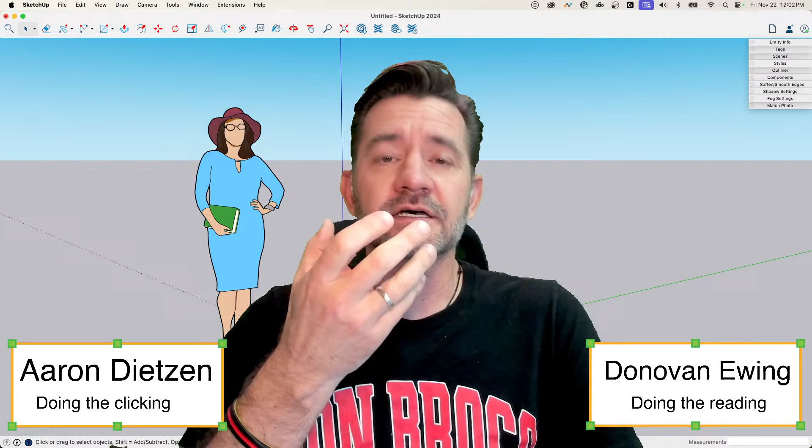When we were actually modeling live at Basecamp, I threw out a question to people with three options: quick and dirty Las Vegas building models like casinos or hotels, some Vegas-y entourage like a roulette table, or the Las Vegas sign. We had people vote, and the buildings came out ahead, so we did a low quality rendering of five buildings.

We started with the Luxor, which is a pyramid - that was an easy one. Then we did the Sphere, which is a follow me circle - that wasn't so hard. Then we did the Mirage, the Rio, and the Aria. They were low quality, quick and dirty, but looking at how to use colors or projections to make quick and easy models. It was fun, it was cool.

We only had an hour, and we got all of that done in an hour. The class was fantastic - perfect live modeling SketchUp live. So it was cool, it was fun.

The thing that came in second was the Las Vegas sign, so I thought that'd be a fun thing to spend some time on in our live session. Coming back from Basecamp is a little bit of work, but I think this would be a fun one to make a cool model. It's not terribly complicated, so we'll have to do some stuff with fonts and maybe an extension or two. But I also thought of some cool stuff we could do to add a little animation to it. Let's hop in.

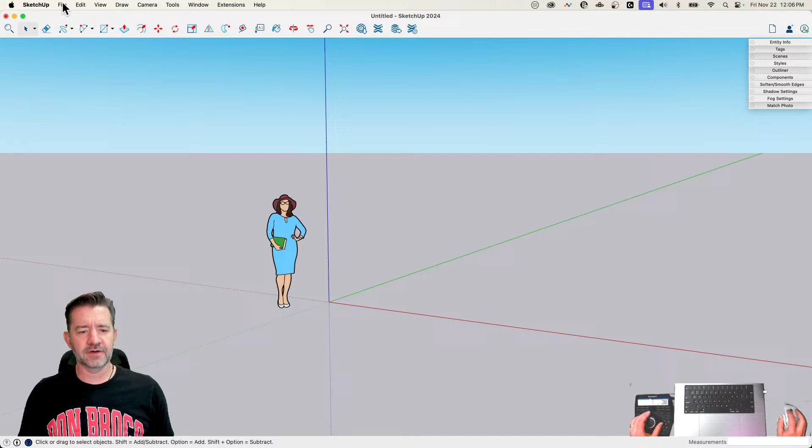Yeah, let's get in and model this thing. I'm going to start by importing a reference model. I'm just going to go to File, Import, and I have an image on my desktop. I'm going to import this as an image, lay it down on the ground nice and big, and that's what we're going to model.

Oh man, so many people all around the world. Hey chat, what's up, as you're saying in the chat. To call a few people out, we have people here from Bavaria, Salt Lake City, Colorado, Finland, North Yorkshire - am I saying that right? Yorkshire, hold on, yes. A bunch of people coming back from Vegas just like we did. We've got people from Vancouver Canada, Wisconsin, Peru, all over - Connecticut, Arizona, Wales, Toronto, Spain, Devon, Syria, Newfoundland. I recognize some of these places.

On social media the algorithm feeds you what you want to watch, and the last several days I've gotten so many posts of people in Finland because of all the snow there. I love snow, I love winter, I'm from Montana with mountains and all that. So when you said Finland my mind just went back to those posts, it makes me want to just go. Let's just go! We've also got people from Kenya, from Ontario, and Yorkshire - yes, where the pudding comes from in Northern England. However you remember it, that's cool.

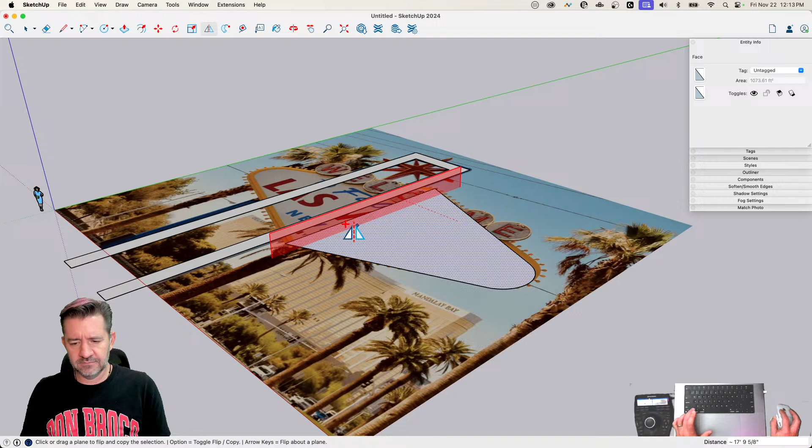I'm going to take that and do the same thing, just mirror that. Modifier key, pull that down to the face. There we go - whoops, too much deleting, over deleted. That's all right. In SketchUp, you can undo up to 100 times. Still my favorite command, undo.

All right, so I'm going to grab that and make that into a group. So what I'm doing here is I want to model the main pieces - there's 1, 2, 3, 4 pieces. I got the frame, this right here, the stand - I don't know what you call it, the base, the legs. Well, we are all about that. And then I got the outline and sign, then the bubbles up here with the welcome letters, and then the star.

So I'm just going to model 2D representations real quick of all those things and then start pulling them into 3D space. So let's get this circle in here - same thing, circle still 48 sides because that's what my last one was. I'm going to pull it up. Ooh, dang, that was pretty close.

A little smaller. All right, and I'm going to take that one, option move it along the red axis over to here. Again, parallax - I'm not going to worry about, I don't want to put it up here. I want to put it in a straight line because I believe that's what's supposed to be happening.

WELCOME 7 - I'm going to click here and then divide by 6 because I want 6 copies total. Oh, those touch? They don't touch. That's perfect, that's exactly what I wanted. Grab that - sometimes things just work out. No matter how, sometimes I try as hard as I can and things work out anyhow.

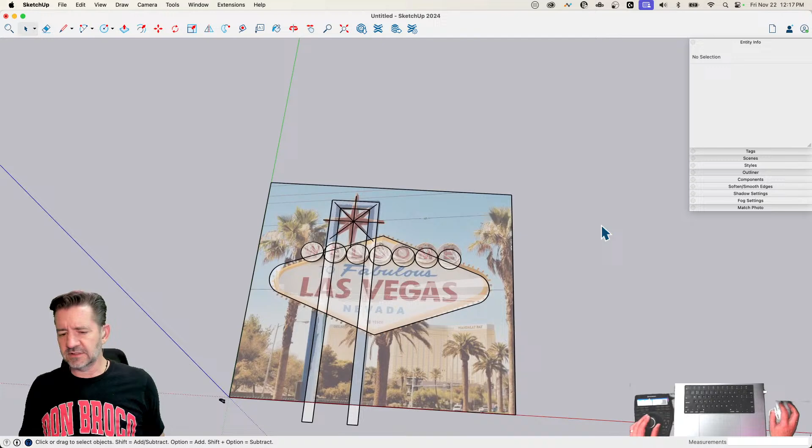What I actually wish I'd do, I'm going to do this. I got my picture in here laying flat on the... you know what I should do? Ooh, that was a thought. I should save. That's very, yes, very good. It's only taken me a couple of years, guys, but I have figured that out.

All right, you know, sometimes we do it intentionally. Like Austin Powers says, we like to live dangerously. Sometimes. Yeah, I guess today's not one of those times.

All right, I'm going to come into my styles real quick. I already have this image drawn in, dropped on the ground, so I'm tracing it, working with it that way. But I'm also going to come in and add it as a watermark, and put it in the background.

Put it in the upper left corner, which I like to do. We don't need quite that big. Something like that. All right. That way I can look up here and see where this goes.

So the star hits at these two corners right here, and the pokey bits - I don't know if there's a better term for those. The prongs, that's a fork. I don't know. They go just beyond, so they lap up onto the edge like that a little bit.

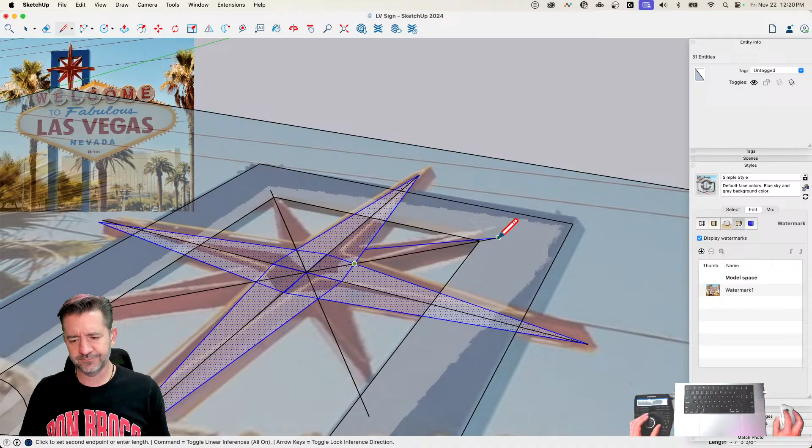Trying to get a surface there. Oh, I didn't try this side. The middle - there we go. So this one, I don't have.

Let's see, I could probably use flip and the red inference. I don't know, if I wanted to mirror this over here, the thing I would do is probably grab that line right there and rotate it to here and close it up. I guess I could figure out how to use flip to do that, but that seems much quicker. You can grab that piece.

There's no clean way to show this. Go here, 3x. Oh, I didn't do something right. Ooh, that's fun to watch. Yeah, let's try that again.

Start from - hey, speaking of fun to watch, Bertrand over on Facebook says, 'What's up guys? What's up?' Something bad happened all the way at the beginning.

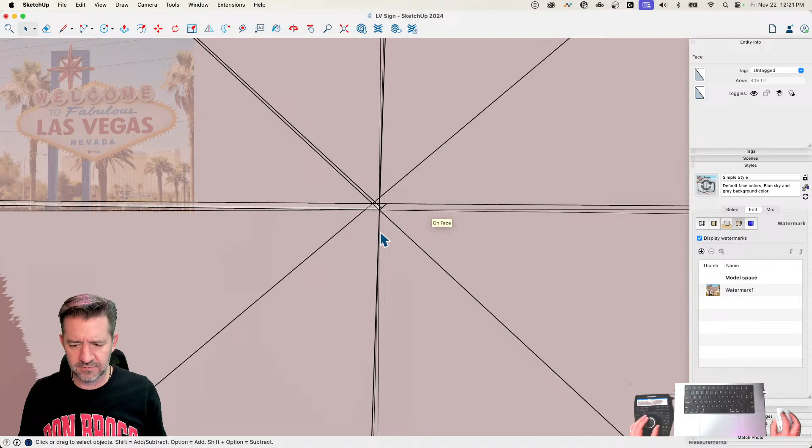All right, and now, as Don was talking about those 100 undos, we're going to try 1, 2, 3, 4, 5, 6, 7, 8, 9, 10, 11 of them. All right, what happened? Oh. What the ugliness is this? What did you do? Something bad.

So we have reached the point of this show where Aaron can spend time trying to figure out what happened, or, I could hit delete and do it again. It's probably going to be quicker.

All right, so I'm going to come in here and hide some stuff. I'm going to grab everything, in fact. Let's grab it all, and temporarily hit hide to get it out of my face. Actually, no, I don't want to do that because I need this. My decisions sometimes change at the speed of thought. That's probably how thoughts work, right?

All right, so I'm going to run that down into the sign just a little bit. I'm going to grab it by the middle point, and turn it 45 degrees, 3 times, to give me all of my sides. Then we'll grab that, inference straight up, and bring that down to the corner, like that. Then same as before, I'm going to do a circle out to just past that, so I can snip off these 3 pieces, and get rid of that circle.

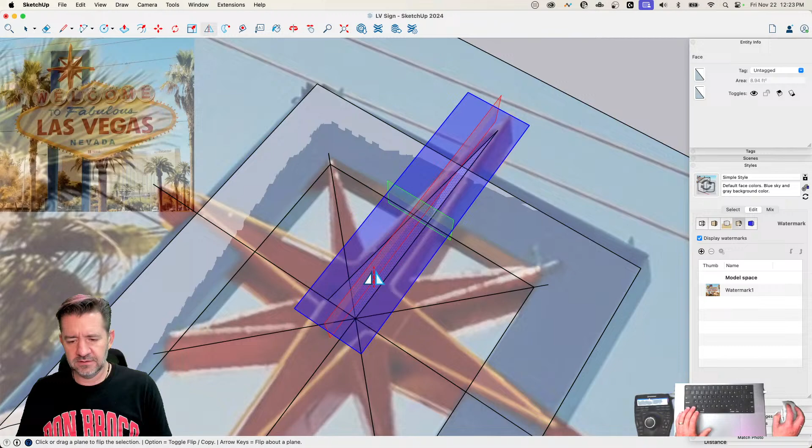All right. I am not going to bother grouping that. I'm just going to go with this geometry and then bring a line down like that. I'm going to take that edge and mirror it. Seems much easier, right?

And then, watch this. Ooh. Then I'm going to come right here, bring this down to here, straight across to here, here up to here. There we go. And I'm going to grab just that piece.

Option 45 degrees or 90 degrees, 3 times. And that should give me, there's the geometry I want. Now I'm going to make that into a group.

Sometimes, this is probably pretty obvious, but sometimes you get stuff and you're like, I know exactly how to do it. And sometimes you do it wrong once or twice, and then all of a sudden it makes a lot more sense on how to do it. Yeah, I do that. This is why we're here. We're here to learn together. It's not just to watch me fail.

Cool. All right, Patrick O'Brien is asking, do we have any updates from 3D Basecamp? I don't see any YouTube updates. We do have some materials that will be going live on YouTube. It's just a matter of reality. We go there, we work there, and then we come home from Basecamp, and most of us are catching up then on the stuff we didn't do the week we were at Basecamp and the weeks leading up, because we're busy getting ready for it. So things like editing down videos or sharing information is absolutely something we like to do, but it does sometimes take a little bit of time. So it's coming. It's coming.

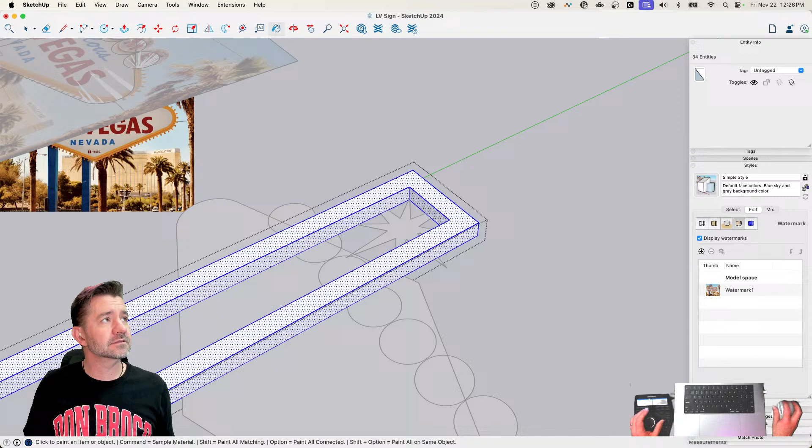I'm going to paint it because I can. All right, Windows users, try not to drool, but we do have, I'm going to use my colored pencils to pick a color. I'm sorry, I know, Mac only. Yeah, you want to talk about a hotly contested debate when you're in person with a bunch of people, bring up Windows versus Mac when using SketchUp, and whoo!

It's true. All right, so I'm going to do this. In this group, I'm going to run this edge long. I didn't do that first one right. Let's start over. All right, inference here, run that long. Inference here, run that long. There we go. Then I'll take that piece

And I'll rotate it from the middle.

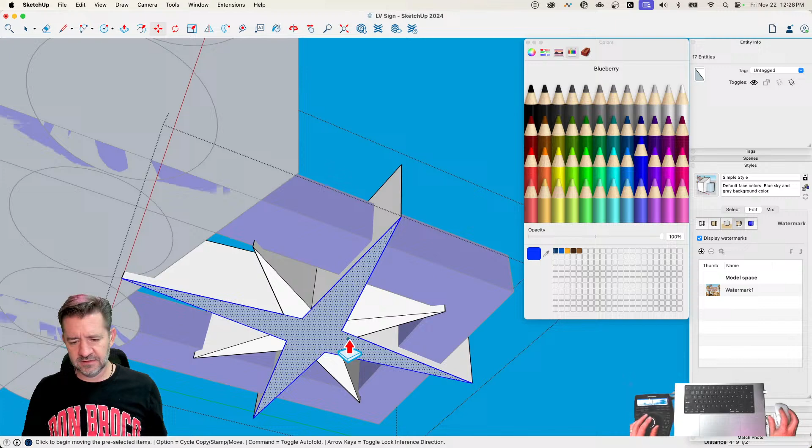And then I can take this piece and bring it a little higher. To get it done on the other side, I'm just going to Option-copy that down to the other face. I don't know what the back of the sign looks like, so I'm assuming it's the same as the front. There we go. Creative liberty, right?

Got a couple questions. Randy is saying in one of Aaron's videos, he showed how to make a stamp of a circle and then clicked copies of it all over the object. I cannot figure out how to do that.

Suggestions? Sure. So you can take anything, it doesn't have to be a circle, a rectangle, whatever it is. If I take that and go to move, I have the option - if you look down at the bottom, because I don't know if you're Mac or Windows, but down here I have the key. So in this case, my Option key will cycle between copy, stamp, and move. Right now I'm in move, but if I hit Option one time, now I'm in copy.

And if I go to move and hit Option, now I'm in stamp. And I take this one and go place it, place it, place it, place it, place it. That's all there is to stamping something. Doesn't matter what it is - it can be a group, component, single face, single edge, whatever. That's all you got to do.

The more you know. You have to cue the music. All right.

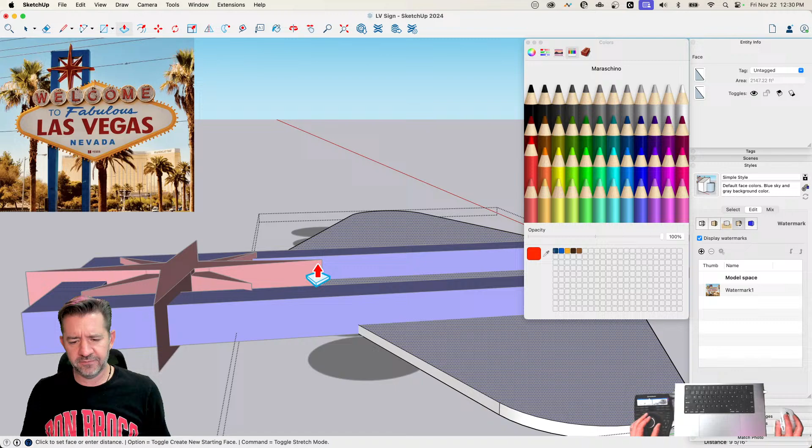All right, I'm gonna come in - well, here. Someone's asking, did Aaron see Omar? I'm guessing at Basecamp. Yeah. I don't remember if Omar was there or not. Yes, no, I think I did see him, I think. Yes? Could be. Got some.

Again, Patrick says just do low poly palms. Low poly palms, yeah, that's kind of what we did. I did once before, like I said, if you look somewhere in - because we did some images for a marketing campaign, and one of the things in there was some low poly palm trees. I think I did videos on both the leaves and the arcing shape that was the trunk. I don't know, you'd have to dig a little.

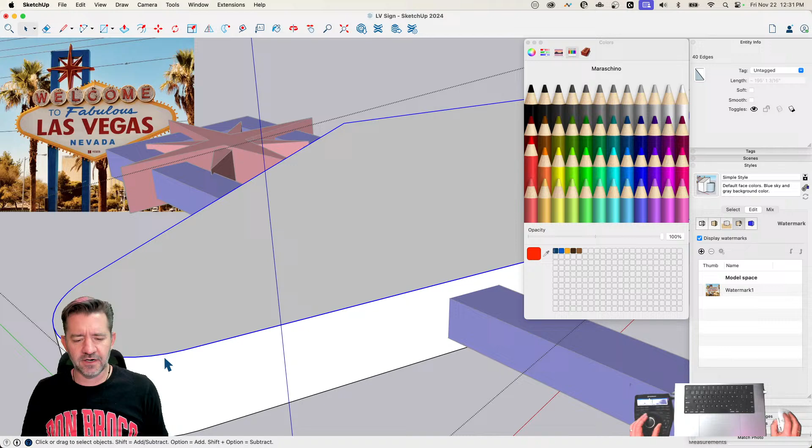All right, one of the things I noticed right there is when I did the push, I got some segmentation. That means somewhere my arc broke. So I'm just going to select all of this, right click and say weld edges. Since I'm doing this two-sided, I'm going to go ahead and do the same thing - weld edges here.

And now I need to make this - you can see it comes in and then there's kind of a lip up. So I'm just going to do double offset. I'm going to come in here, offset once, and then double click to offset a second time. That second one I'm going to pull up. Actually, before I do that, I'm going to switch over here, offset, double click, because if I double click it does it the same amount as last time.

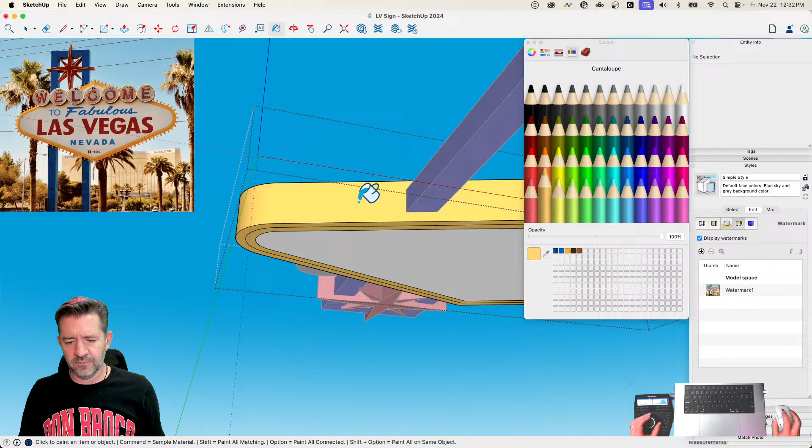And the other thing I'm going to do is paint this before I modify the geometry, because here's why: when I offset that up now, see how that automatically changes color? If I had done that while it was still white, I would have to go in and paint all these little edges, and I hate painting little edges like that. So there we go - much quicker, much easier, much, dare I say, better.

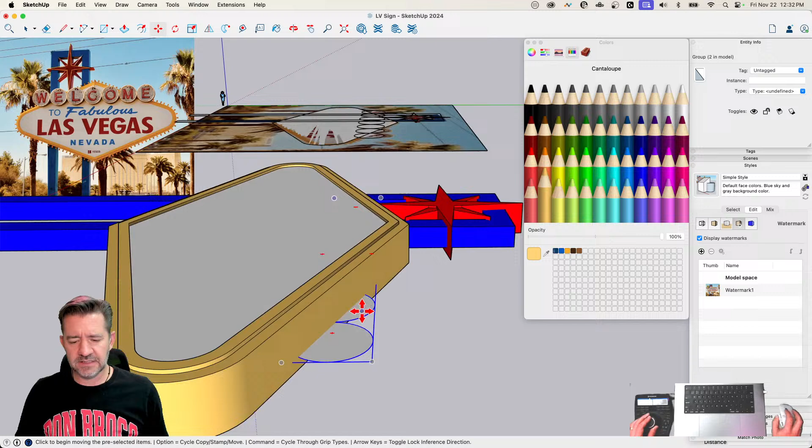All right, we're getting there. We're getting through this, this is just coming right along. I'm gonna grab these guys right here, and I'm going to pull them up till they are up to the highest point.

And I'm wondering - let's throw this out to the chat. Perhaps somebody out there knows or can find what the back of the Vegas sign looks like. Is it the same? Because I'm looking here, and I'm wondering if these circles - they're obviously sitting in front of the Fabulous Las Vegas part - but is there a copy of them on the back? Because I don't see them. So I'm wondering if the back is just kind of blank.

Challenge issued. What can you guys find?

Let's give these some depth. I did not make these components or anything like that. I'm kind of feeling like right now, I should.

Marty is saying save. I just rewatched the Notre Dame video. Save. There we go, I saved. All right, I'm going to do this. I'm going to get rid of most of these. I'm going to grab this, make it a component.

And then I'm going to take it, option copy it over right on top of this. Whoa, whoa, hey, whoa, everybody settle down. Ooh, hot mouse, I'm a little excited there.

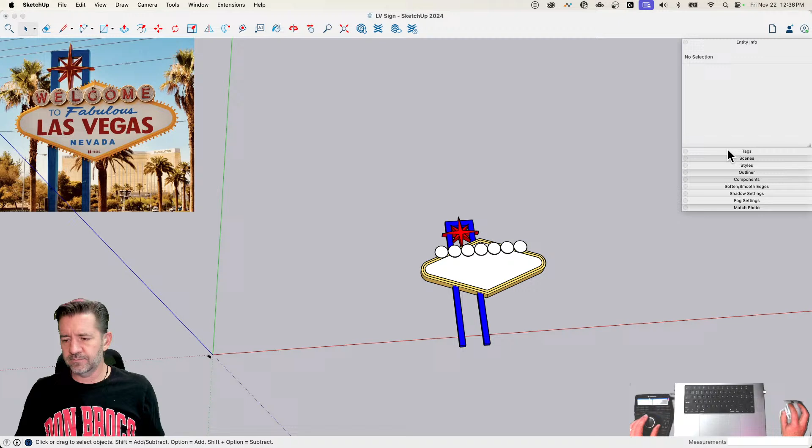Reference. I will take all of this, I will add it to reference, and then I will turn reference off. That's all I need. I still have this image up here to refer to, but I don't necessarily want to pull anything off the ground. Except I'm going to have to do that in a second.

Let's look at these welcome sign, or the welcome letters. So they are, you can see I do have just big welcome letters on here. And then there is fluorescent tubes in each letter so it lights up.

So I'm thinking what I'll do is use 3D text to put welcome on here first, put those big block letters on, and then I'll come back and we'll do a 3D circle over the letters to emulate that little tube going on there.

Same with the outlines, we'll do the same thing. We'll do outlines here and then the outlines on the star. I think for this piece right here...

Fabulous Las Vegas, I think Fabulous, I'll actually cut that out of the image. So that's my thought, that's my thought process right now.

Welcome's going to be actual letters, 3D text. We'll do a bunch of follow-me's for the different pieces of fluorescent tubing, and then we'll pull this out, and then we'll use an extension to get the light bulbs around the outside.

Peter said one of the words Aaron was looking for is efficient or effective. What was that in reference to? I don't know, I don't know.

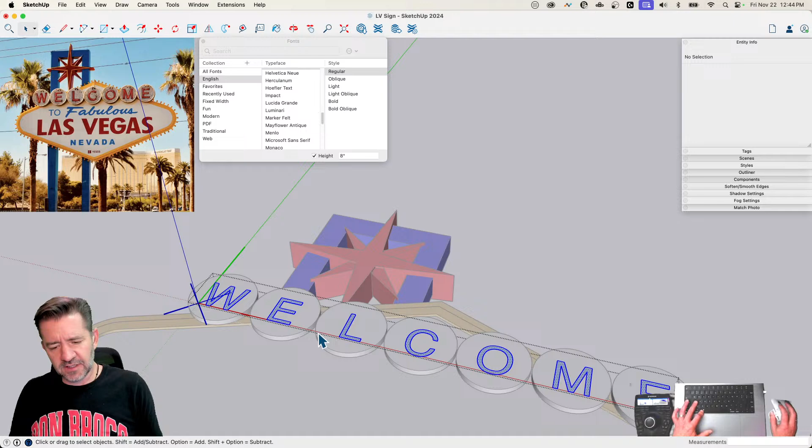I'm going to come in here, select all of it, and reverse the face. I'm going to right now color it red. And now, once that's done, I will select, put these into a group together. Actually, I could just leave it like that, there's no reason to explode it since these are components. I don't like where that W is.

That's better. Looks close enough, right? There would be sometimes passable. You get that thing where you're like, ooh, something's not right there. That was one of those times.

Okay, so that looks pretty good. I was just saying I did not put it in because these are components. So if I make a change to one of these, it's going to change all of them, which is going to make it quicker and easier to do the fluorescent tubes on here. And I'm going to do perfect fluorescent tubes, by the way. So the image has them bending and going back inside grommets to the inside, but I'm not going to do that.

We're doing fake, surreal. Nothing in Vegas is real, so we're not going to start now. I'm just going to come in here. Why start now? That's right.

All right, so in here, I'm going to triple click to make this a group. It's going to isolate the geometry. And now I can come in here with a circle. Bring that out, not all the way to the edge, but pretty close. Something like that. And then I'm going to go to that top. Which one? Where to go? This is the top edge. I'm going to go draw a circle.

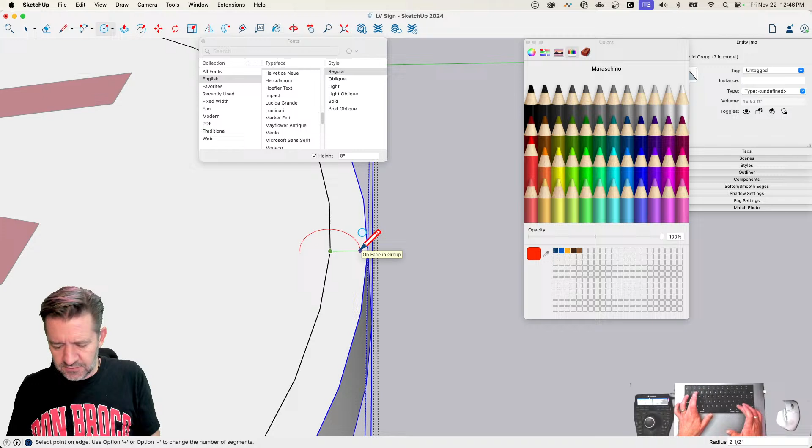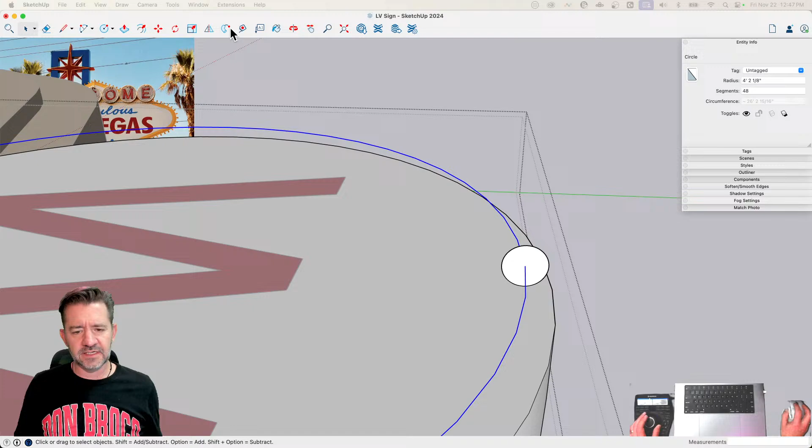Like that. And I want to pull that out so it almost hits the edge right here. And I'm going to note that 2.5 - that's going to be the size of my fluorescent tubing throughout the model. Take that, bring it up vertically. Get rid of this face. Select here, we don't need fonts anymore, we don't need colors. You guys, stop crowding me. All right, and then I'll say, follow me with the circle.

Yeah, baby. All right, those look kind of white, but I'm going to give them kind of a light yellow color. Yeah. Yes, yes, yes, okay. Is that just for distinction? Yeah, because it looks good. Sometimes that's it, it just looks good. I'm thinking about some things right now.

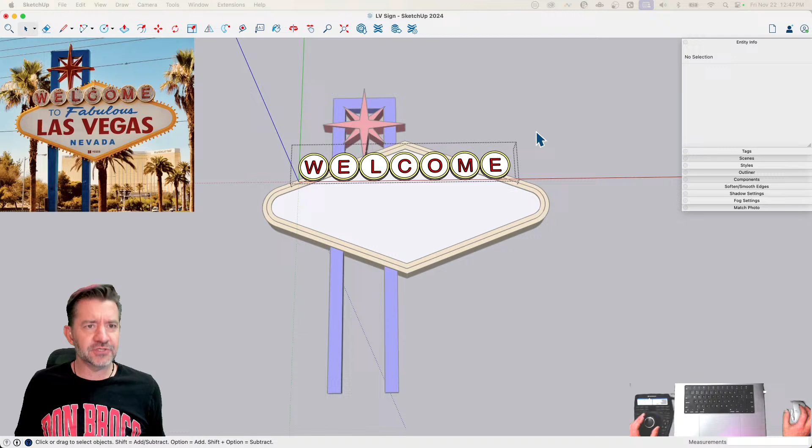Let me share my thoughts rather than just tell you. We're here for you, Aaron. Thanks, buddy. I think I'm going to...

Change how some of my stuff is showing up. So I'm going to come in here. Actually, I'm going to back up a couple steps. Z, Z, Z, Z, Z, Z, Z, Z. I don't like this circle. It's too big.

Sometimes you don't know something's not right until... let's try that, 1.5 inches rather than 2.5 inches. Follow me. Yeah, I like that better. Okay. Sorry. Boom, okay, there we go. That's better. Yeah, I want to change how I'm visualizing things.

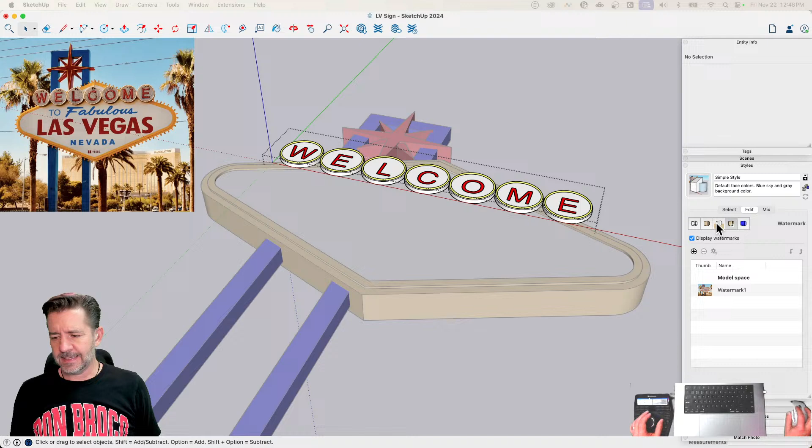So I'm going to go into my styles. I am going to see what it looks like without profiles. Maybe without edges altogether - who needs edges? I will probably need edges, but we'll come back to that in a second. I'll probably also bring on my ambient occlusion. Oh, heck yeah. Make it pop. Yep.

All right. It does make me wonder how much modeling could I do without edges? I inference edges a lot in my models, so I wonder how far I could get. Probably not very far. So I'll turn my edges back on.

This isn't one of those watch-Aaron-be-in-pain-the-whole-time sessions. But hey, next time we want one of those, that might be the way to do it.

All right, so if I come in here, now what I got to do is make outlines for all of the letters. And I'm trying to think of the best way to do this. So on this outside edge, I'm just going to inference like that. Ooh, look at that. This is interesting.

Okay, no, I'm not going to do that. I'm going to start here, and I'm just going to go to the middle of here, up to the middle of here, down to the middle of here, to the middle of here. Because there's actually a taper to this. This is not straight, these two are not parallel - there's actually a slight taper between the, that's very interesting.

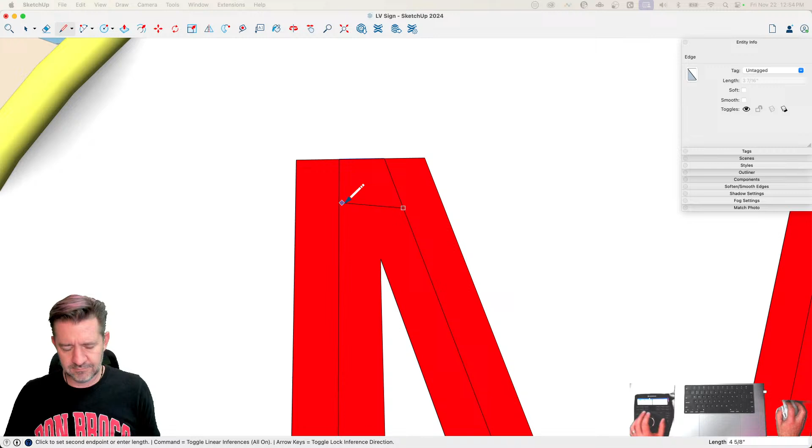Just the imagination and skill and talent and fun that people bring into a software program. So at the end of the day, this is just a piece of software, but it was amazing. I enjoyed it so much. I walked away so inspired, which is part of the point and purpose of Basecamp, to just give people inspiration by being around other like-minded SketchUp users. And that's how it went for me. I walked away feeling so inspired, and walked so much, and ate so much, and talked so much, and it was great. It really was.

Absolutely, I agree with 100% what you said. Philip says, yep, I did. It was a great time and really good having Basecamp on a different floor, which gave the community feel. So, yeah.

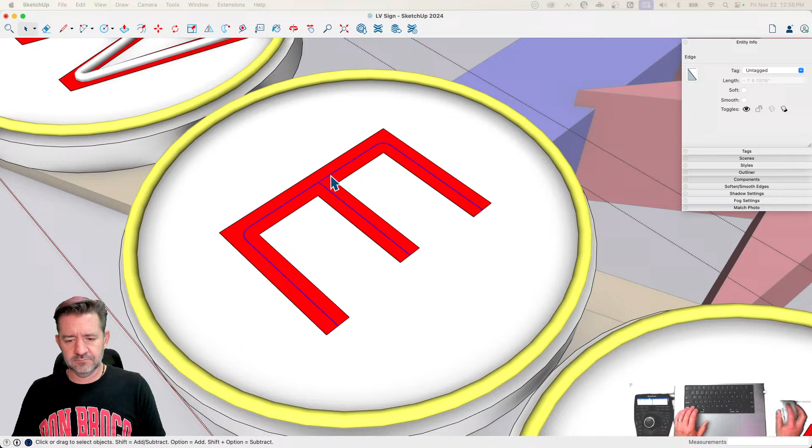Ooh, Earl asks, what is the primary purpose of Basecamp? To learn SketchUp? Oh, primary, that's like saying... I don't know, I'm trying to come up with it, it's the best flavor of ice cream. I don't know, I'm thinking about ice cream for some reason.

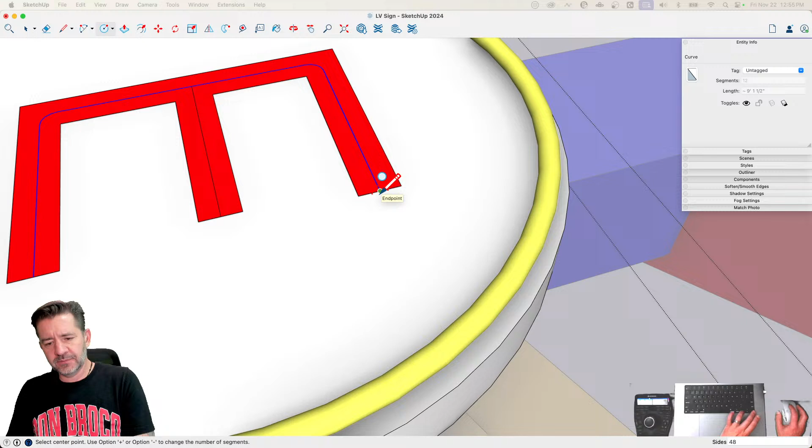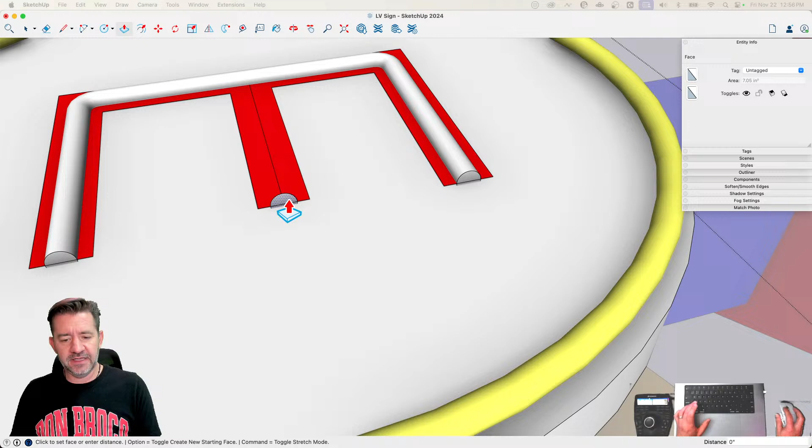Yeah, I mean it is a user conference, so we definitely lean into part of the reason we do it - part of the reason we do it is so we can hang out with users. I mean, that is a big, huge piece of why we do what we do. It's also an amazing learning event, so you can actually come to Basecamp and learn to use SketchUp better than you ever have before. But yeah, it's all those things actually. So yeah, I mean, user event I guess - training, networking.

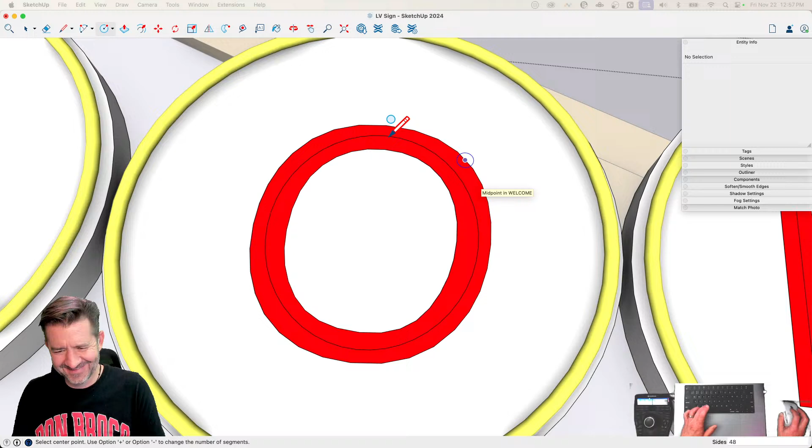One thing that I do have to admit about a lot of people in their professions is there's a lot of professional people that either work alone or they work in small teams. When it comes to SketchUp, you're typically not talking about large firms with teams of 20 or 30 people. You're talking about small firms, small teams and things like that. And so SketchUp really is - and Keggy, we're not trying to be cruel to the people that couldn't be there, we're not trying to rub it in for the people that couldn't be there. We really want people to be part of this and to be part of this community. But like I was saying, a lot of people come from these very small teams where they kind of work in a bubble and a vacuum.

And one of the other great things about SketchUp is you can go and you can see how other people use SketchUp in a way that you never even thought was possible. There were classes about using SketchUp to calculate acoustic - specific acoustic reverberation in different rooms and things like that - just fascinating ways of how people have utilized SketchUp. And you get to see all that and talk to the people who use them in these different ways, and it's just, like I said, very very inspiring. Not trying to rub it in, Keki, just very inspiring.

I wonder how many people don't know any other SketchUp users at all. There's a lot of people that use SketchUp, so I'm sure that number is probably pretty high.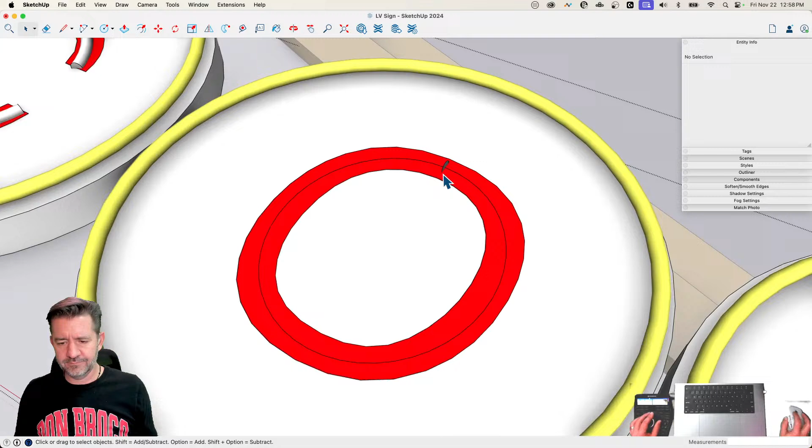Patrick says, please bring Basecamp to this side of the pond. Don't we have a UK-like Basecamp? So, outside of the US, what generally happens is that those base camps are usually done through distributors. My suggestion would be find your nearest distributor and ask them if they're doing a base camp.

You've been to a couple of those international ones. One of the first base camps I went to as a team member was in Japan, and that was pretty cool.

I think we would love to do as many base camps as we possibly can, but there's a lot of work that goes into it. So it's kind of hard for us to put on more than one every 2 years. But yeah, they do exist, they're out there. Just really gotta talk to your local reseller and see if they're doing a base camp.

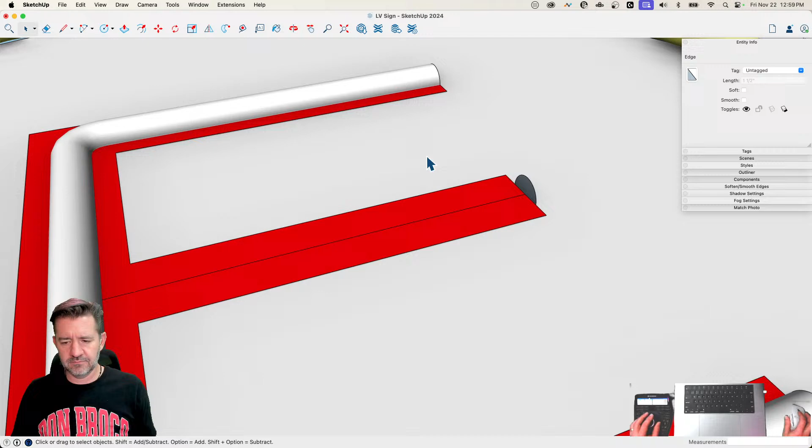And if you weren't able to make it this time, start a piggy bank. You got 2 years. Next time will be 2026, by the way.

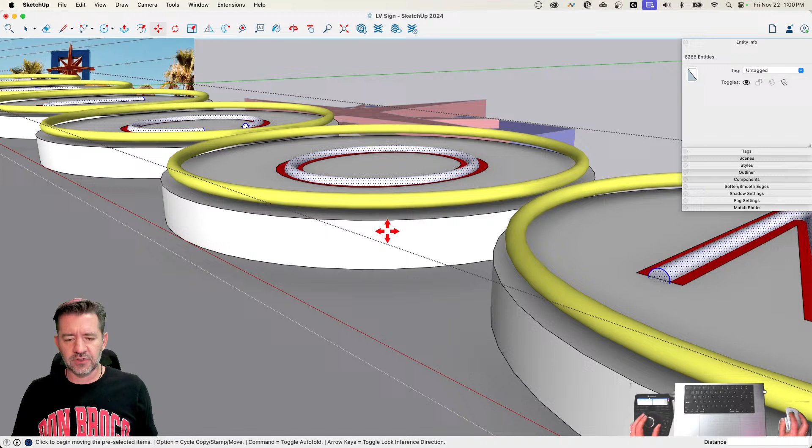Earl asks, does the SketchUp development team present at Basecamp or take feedback from users there? We actually had a thing called the UI UX lab where people could sit down with our product development group and talk about what was upcoming, what they liked, struggled with, that sort of thing. It was a great opportunity for people to get their voice heard. A lot of people said that was one of their favorite parts of it. So yes, that was a thing.

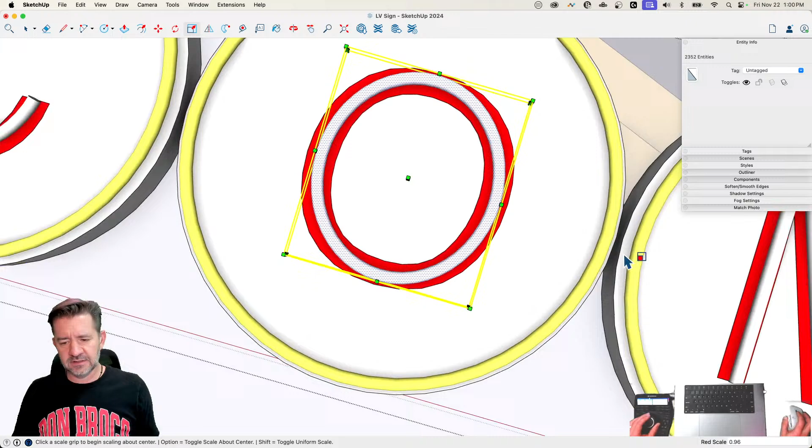I'm just doing a little fine tuning here. Got my tubes in here, and I just want to kind of, my circles didn't end up as perfect circles because of our font, but I'm making it work-ish. All right, we got that in there.

Here's what I think I'm gonna do. Actually, let's pause, let's back up for a second. I like this, I like the white and the yellow, I think it looks cool. But what if we take advantage of what we got here? What if we were to put a lower opacity?

Kegi says, how about getting Trimble to do a lottery for an all-expense-paid trip for non-US peeps to go to Basecamp? We have done some things like giveaways in the past, so that is not a ridiculous thought by any means.

Another option is that every Basecamp we put a call out for speakers and presenters to come and teach us about your process, your workflow, what you do, how you use it. That is a possibility of having some of those expenses covered, is to come and present at Basecamp and be a teacher. So that would be the perfect reply: learn what you do better than anybody else, and then come to Basecamp and teach us all.

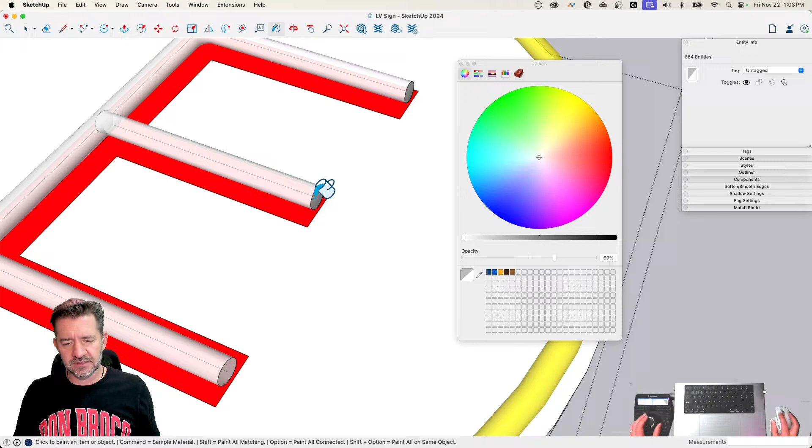Most of the content is actually presented by users, so it's not Donovan, Tyson, and myself going up and doing all the training. It's actually the people who use it doing most of the training. So it is primarily taught by users. That would be a great way to get there. Well, it wouldn't get you there exactly—we pay for a ticket and a hotel room, you do gotta pick up your own flight, but that's it.

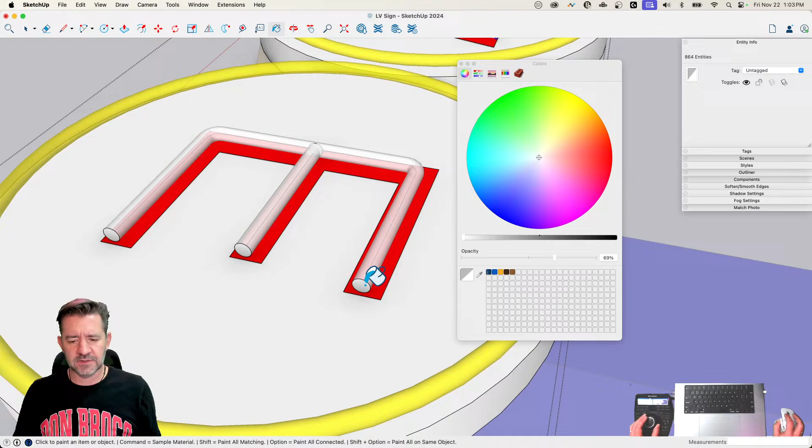Studio RT Cool says it's Trimble's every year. Yes, it's called Dimensions.

Randy says, why not offset the inner oval to make it match? I guess you're a little bit beyond that. We're catching up. D-Cube asks, can you make a component out of several groups afterwards? Yep, one could.

I like that, it's kind of cool the way it's set off and you can still see the colors underneath. It does mean I got to poke my head inside here, get right inside, there we go. And then get rid of this path in each one. Oop, that means I'm going to have to do some intersecting over here too. Dang, just when I thought I was done.

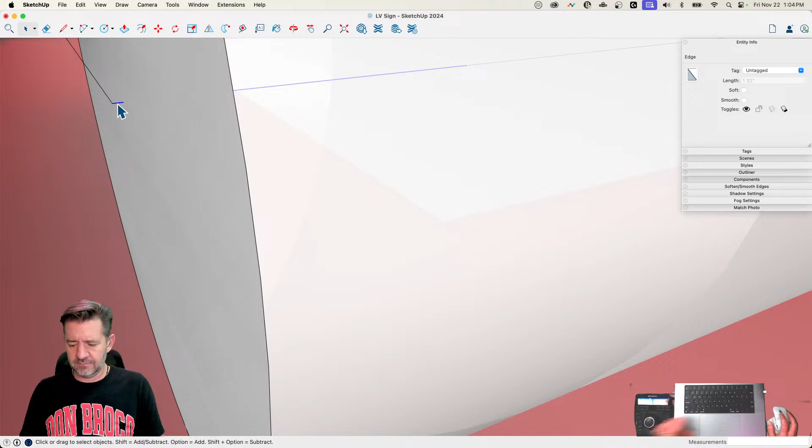Bill says outer tubes should be white, inner tubes should be yellow—the inner side of the tube be yellow, the outer side be white. Oh man, now you're asking a lot of me, I wasn't prepared for that. Let's do this.

Randy says your OCD is going to draw you back into fixing that. I know.

All right, here's what I need to do. I need to come in here, triple click this and make it a group. I'm going to go into that group, and I've got to clean up this intersection before I do anything else. Grab all this, right click, intersect face with selection. There we go. Now come in here, get rid of some stuff. Here's some more stuff.

Oh, 3D mouse, you make it so easy to look inside.

All right, and then because I don't like it, I want to select everything and right click. I'm going to deselect my faces and then hide those edges. I don't want to do that through the whole model, but on these pieces I don't want those edges showing up, so I'm going to do that on all this. Deselect — actually I should do this in bulk after I finish all of them. But I can now, let's see, explode this.

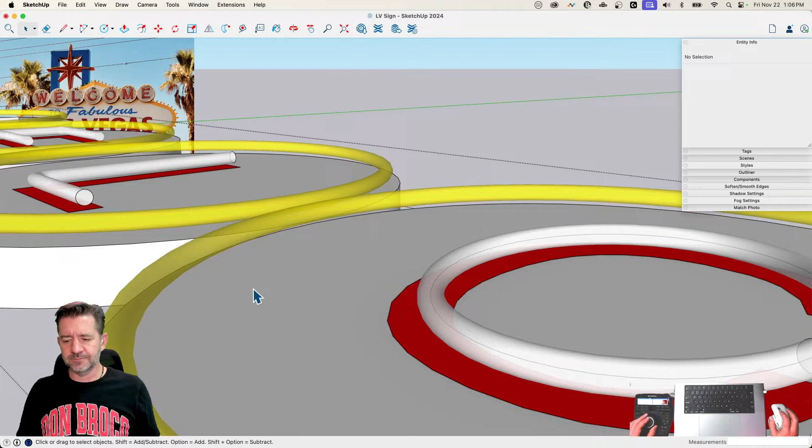Carson says ThomThom's selection toys. I love selection toys, you guys know that. But select and deselect is actually a native tool now, so it got easier.

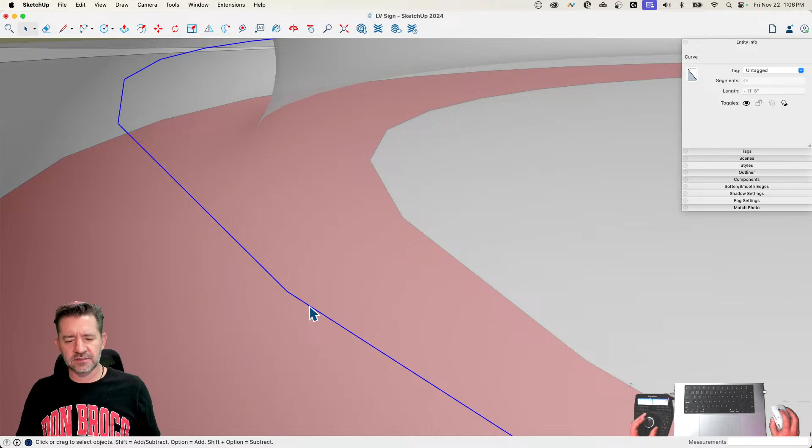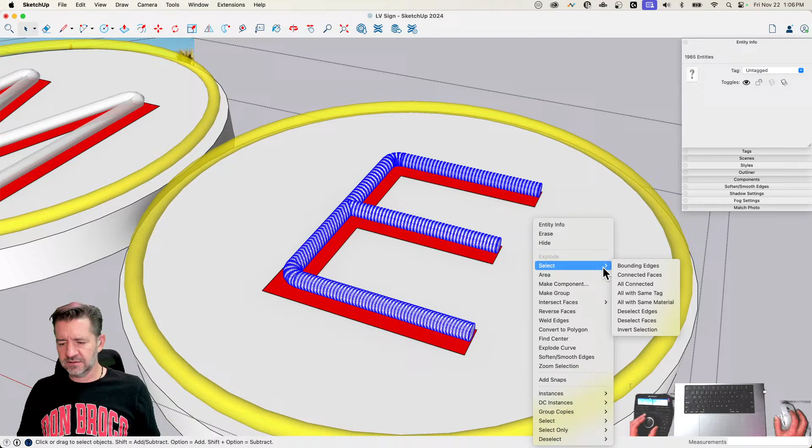There's also, hey, I want to throw this out to everybody here — there is also an invert selection. Who here has used inverse or invert selection? I'm curious. I think it's a cool tool, I like what it does, but I haven't found myself in a workflow where I use it a whole lot, so I want to reach out and see who's using it. Who uses invert? If I come in here and do a group selection and right click... I forgot where it is. No, that's selection toys. I forget even where it is — oh, here, select... no, yeah, invert selection. Does anybody use that? I'm curious.

I had to make this a group and do the same thing I did on the other E.

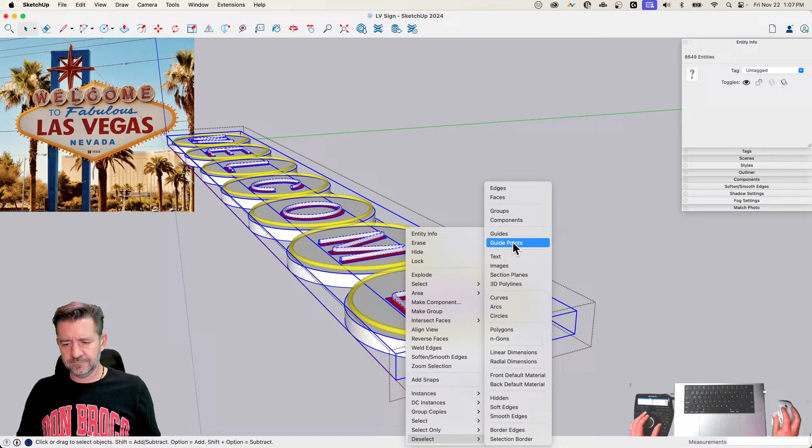Colin says me, Randy says I have, Steven says I use it a lot — I'm guessing you meant 'a lot,' unless you meant 'loot.' Was that a Canadian accent? He uses it a lot. Philip can't say he's used it. Marty hasn't used it. Colin says one use case is when your model has gone tiny because of distant geometry — you can zoom in, select the bits you want, invert the selection, and then delete. That's a good one. Higgy says he remembered it just after spending hours trying to do it manually and then giving up. I like that, I appreciate that — I don't like that, I'm sorry you went through that. I apologize, or I feel you. Yeah, like they say, comedy is tragedy plus time, so we can laugh about it now. I'm always up for laughing at somebody else's pain, and I like to think that's why people show up here — I'll be honest, you guys laugh at me.

Carson says selection toys can convert group copies to one component.

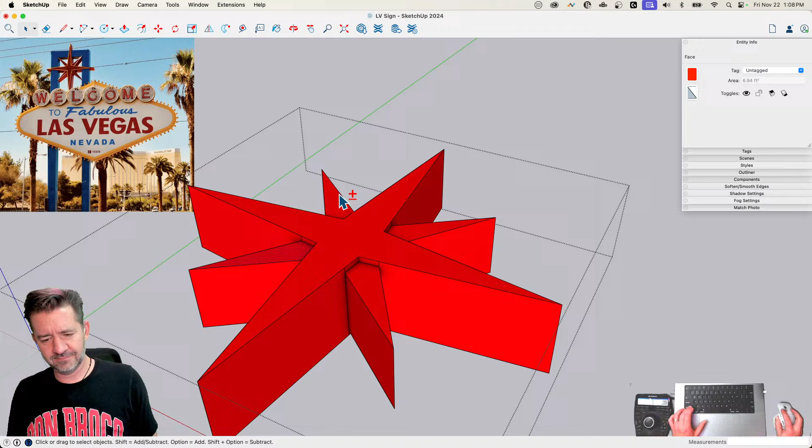I'm going to copy this, come out here, edit, paste in place, and then take that whole thing and raise it up. Now I'm going to make two separate shapes. To make this easy, I'm going to offset this first one. There we go, get rid of that — this is looking cool. Yeah, like that. And then I'll come figure out where to put this.

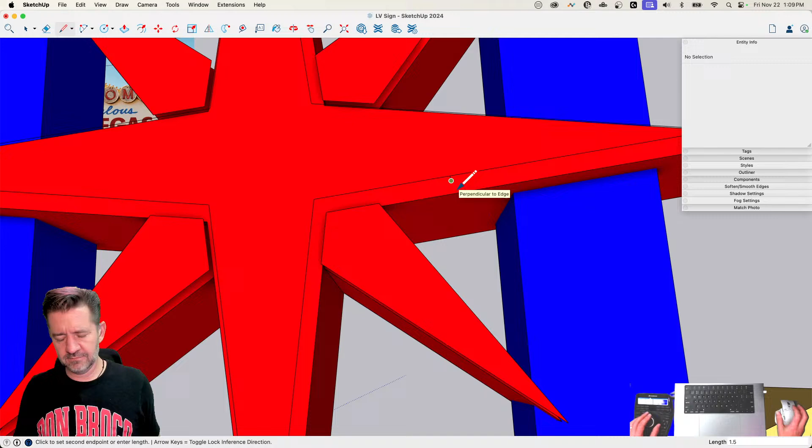Randy says we show up here to share the pain. And then Peggy followed up with one word for you, Aaron: Cobra. See, that's exactly — at least you guys are consistent.

I mean, that's what I want to do with this shape — a follow me along this star, but I want to make sure my circle is perpendicular to this line. This line is off axis, so I drew a little edge here that is perpendicular to this edge. And then when I drew my circle, you can see it's off, so now I can grab it by the center and pull it parallel with that edge. Now when I grab this, I can say follow me with this circle, and I get that.

That also looks like it's yellow, so I'm going to grab the same color I got on this little guy, and put it here. Oops, I need to put it in. Nope, I forget my modifier keys.

That one, that's all the connecting geometry. Once I got that in there, I do have some cleanup to do with this.

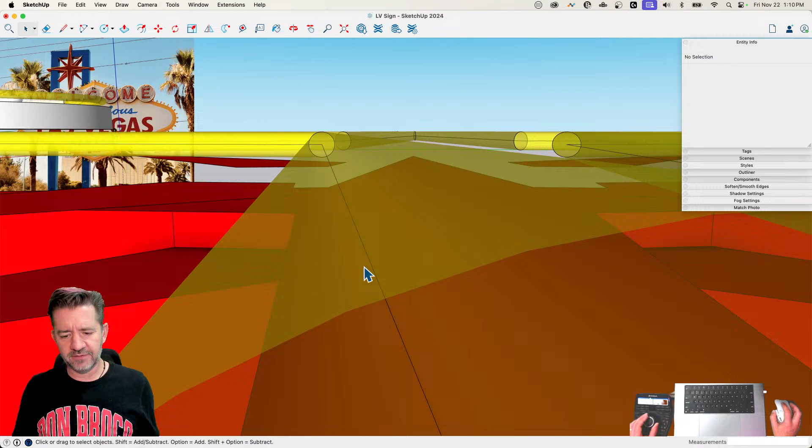One thing I want to do is peek in and get rid of my reference line. Here's my path for my follow me. Triple click, delete that. Then I'll do the same thing I did before: grab all of it, right click, deselect faces, and then hide those edges. So now you just get that good look.

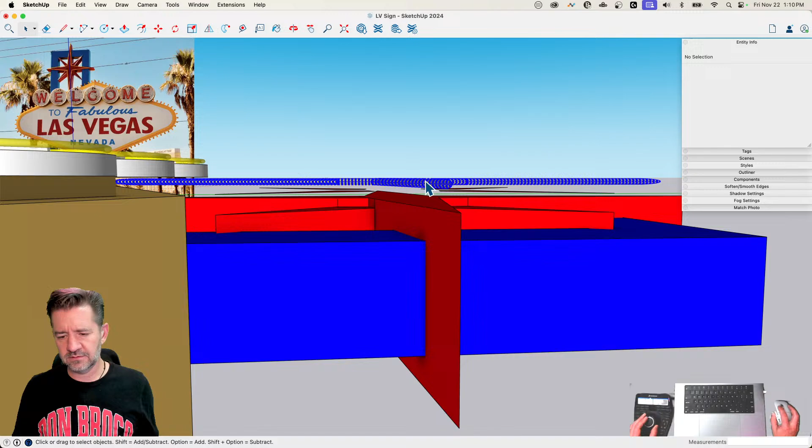All right, and then I'm going to drop that vertically.

Making it look easy. Oh, anybody could do this. John says we don't laugh at you, Aaron. We laugh with you. Yeah, but sometimes I'm not laughing.

Let me get this in here first. So the other thing I was thinking about was this, how do I do this all as one? I'm just going to do this, put in some edges to connect all of here. Make that into a group, that way I can come in here and now I can just connect all that together.

Randy says transparency plus no edges really makes it look illuminated. That's what I was going for, pretend illumination.

It is also made of glass, so it does kind of all. I don't think that's... what are the odds that I made that actually connect? Probably bad, so I'll try back up.

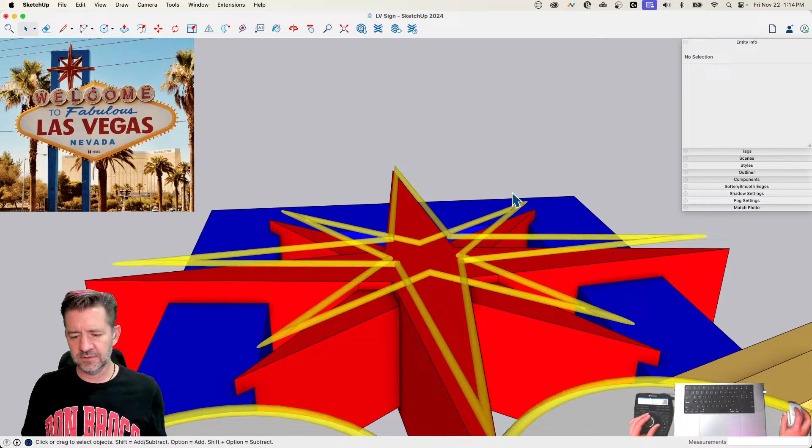Whoops. And grab both of these and drop them down vertically, so I'm dropping down the same amount.

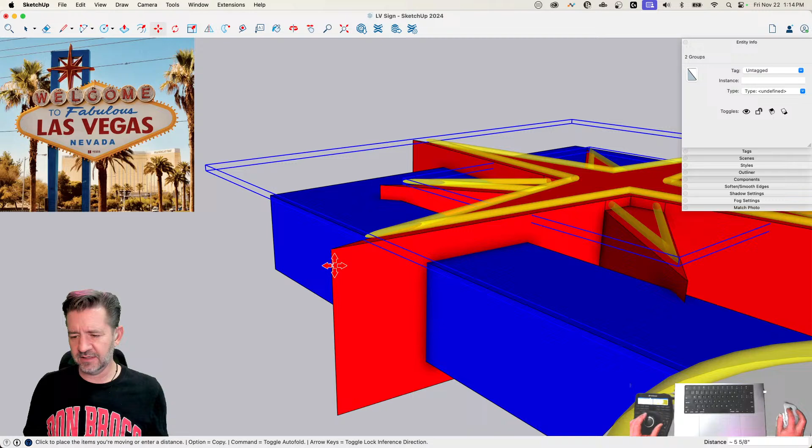There's lapping in, I'm just coming just proud of the surface. There we go, oh yeah, look at that.

All right, a little bit of cleanup on here because the way I did my push pulls, these edges are popping up in a spot I don't want them.

Yeah. Oh yeah, that looks good, that looks cool. All right.

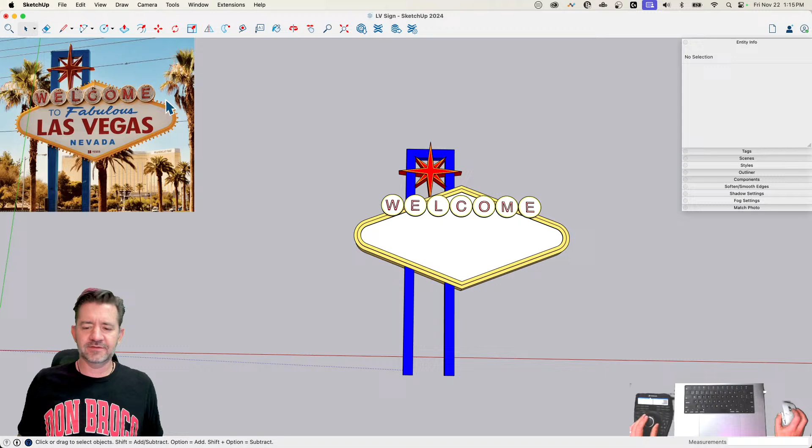Like I said, for the sign, this right here, I think it makes more sense to cut that out of the old sign and put it on here instead, because I know I might be able to find a font that's similar to Las Vegas, Nevada, and the two, but I know we're not going to get this script fabulous. So we have to really make it our own.

So let's save, let's go into tags and turn on. A lot of people are saying that looks cool, the star looks amazing, nice.

Thank you very much. Randy says I really like that technique of rotating a circle to an off-axis line. So something to think about is when follow me takes a surface and follows a path, it follows it as it is, it doesn't flip it 90 degrees first. So if you start with a surface that's turned, you'll end up with kind of a squished version, like an ellipse following the circle rather than a perfect circle.

Which, I'll be honest, in this model, who's going to tell, right? Who's going to be able to know? But I would know, that's the answer. Oh, no, I would know, and it would bother me forever.

All right, so I made a copy of this. Here's what I'm thinking I'm going to do, we'll see how this all works out. We've just wandered into the theory zone.

So if I come in here, this is now a surface. I'm going to come in and just kind of cut out the portion of the sign I want, trying to get as few shadows as I possibly can.

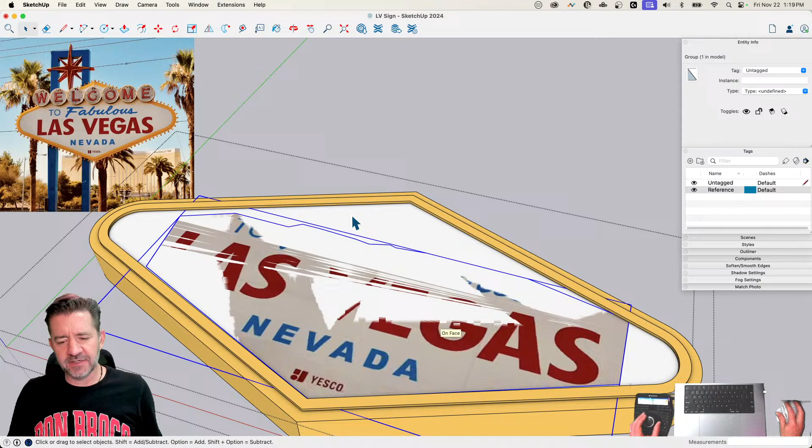So, all right, I'm going to try this. And I appreciate that there's a clean version, we may end up using it. But what if you don't have a clean version? What if you have a photo or something like that? So what I did was I dropped it in - this is raw geometry, this is my picture that I cut out. I grouped it, I put it in there. Again, I'm trying to account for the parallax and that sort of thing, so it's in there fairly good. And I'll grab it and explode it into this.

And Ahmad's saying, why not just project it onto the surface? Because I don't want all this other stuff, and because it won't line up perfect. So I'm trying this - we're experimenting right now.

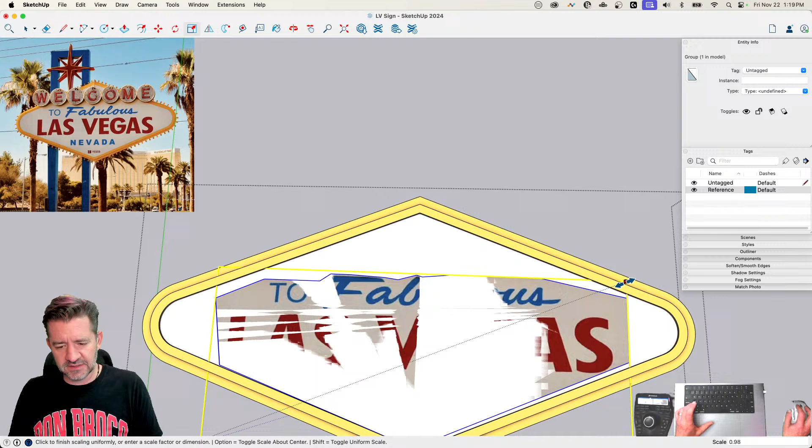All right, I actually need to scale that down a little bit. I get where you're coming from, and I don't disagree with the thought, but sometimes I like to make things harder on myself to prove how amazing I am. No, that was cocky, all right.

So here's what you might be able to do. So obviously this is not showing up as beautiful, but if I bring this up, I'm not sure how much.

I was wondering if I could lighten it up, but it's washing out all the letters. That's not going to work. So I can't lighten it up in here. I could take this to an external software and lighten up, or the other thing I could do is come in here and pick this color right here, fill the back of that in there - and ooh, did not get the right color. Yeah, I'm leaning towards that clean version in the forum right now. I was seeing what I could do with what I got, but I don't like this at all.

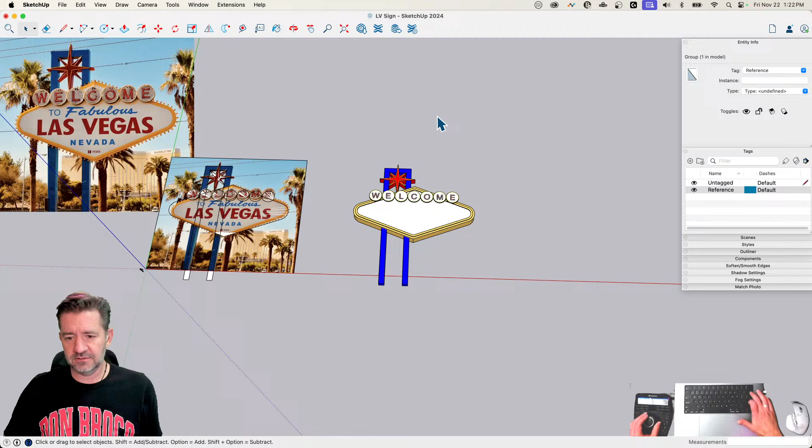I'm going to hop to the forum right now, actually, while we're talking about this, and I'm going to... Yeah, people are saying clean version, go get the clean version, the one with the alpha channel. Even that clean version, it's not white - it's definitely like a tannish color, but it'll work. We're going to do it. This is what we got. We're definitely going to do it.

John's idea is for Indian steep wells. Indian steep wells, Indian steep - I got to look that up, I don't know what that is.

Oh, Indian step well. Oh. Did not care for that sound.

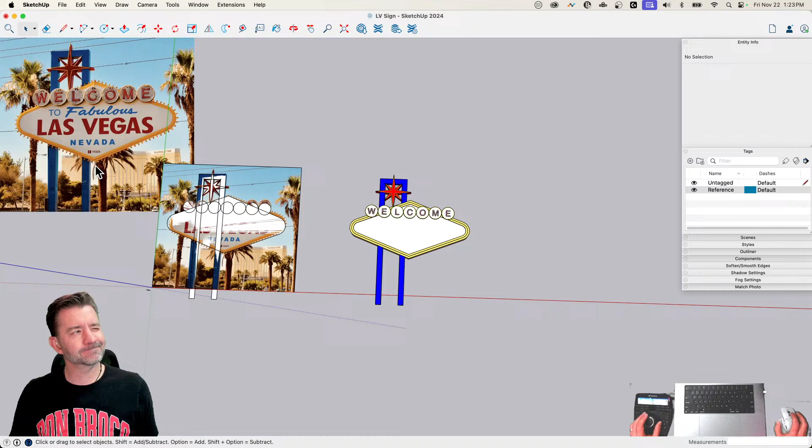Whoa. Did you ever watch the movie The Fall? It was a Tarsem movie back in the early 2000s with Lee Pace. Not ringing any bells. Amazing movie, beautiful cinematography, incredible set design and colors. But one of the locations was the stepwell. It's incredible, also complex, but I feel like it's one of those models you could create one section of and then duplicate many times to create. But you'll have to look it up.

All right, I'll look up a stepwell at some point. Yep, bring ideas in. I am trying to cut around these shadows.

Somebody's saying a trebuchet. I feel like, haven't we done that one before? I don't think so. Have we? It feels like something that should have been on our list at some point, but I don't remember actually ever modeling one. That'd be fun.

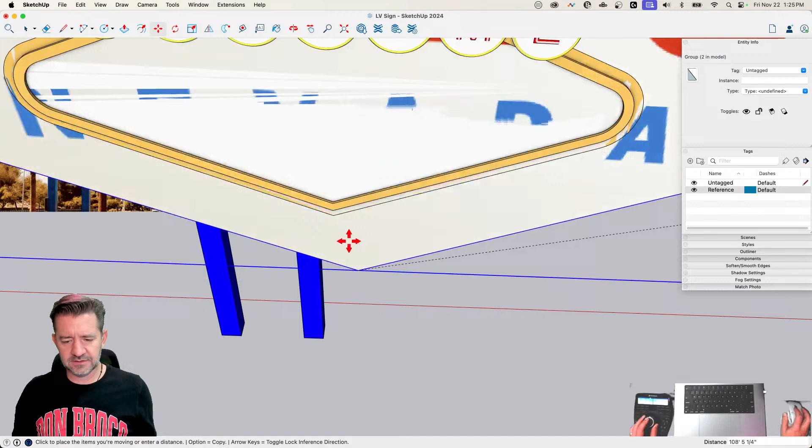All right, I'm going to bring this in. I'm going to paste it. I'm going to get it tucked right down here into this corner. And then we're going to scale it. Oh, yeah. That is good stuff right there. I'm going to do the same thing I did before.

Earl says didn't find a trebuchet when searching through SketchUp's YouTube channel. So yeah, okay, yeah.

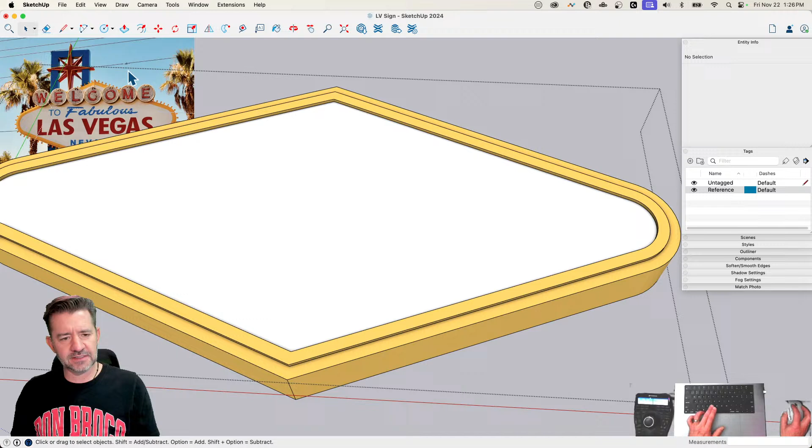All right, I'm going to take that, same thing, cut it, go into context, edit, paste in place, and explode that. And then I do have a little discrepancy on colors here, but this is at least uniform. This is the same color throughout, so that's good, because then I can come in here again, choose this color. Whoops.

Almost. It's so close. So close.

Peter says apparently Aaron works for Scale. Oh, Randy says the tunnels inside the Great Pyramid as an idea. And then, wow, Andrew is asking what is the difference between Tekla and SketchUp? They are different software packages.

I'm actually thinking Tekla is a software package that is primarily aimed... Yeah, there's actually a gradient across here. This is darker than this side. See that? If I get out here, it looks fine.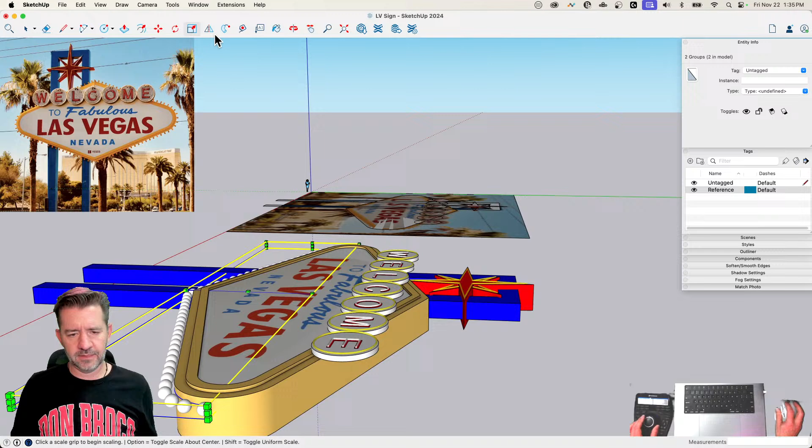And take both of those - not that button, but this button. Awesome. And then I'm going to take that, those two, and we're going to slide them. Oh, I was really close on that end one. It's just slightly off. Whoa, a little double bulb.

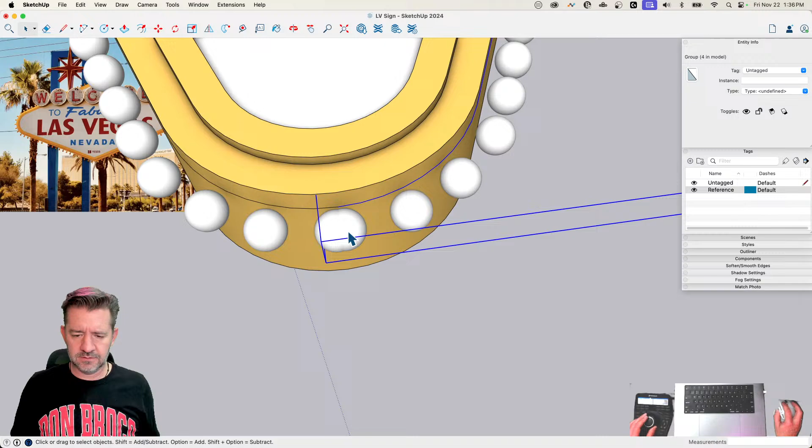Oh, that looks pretty cool. Yeah, so one of the things I was thinking about is like actually modeling it as a bulb with a bottom on it, but then getting it to follow that curve. It's not too bad. Actually, I probably should have just done it that way because it would have been - I would only have to do this many and then manually place 3, and then I could have copied it. I'm feeling like I failed and I have 20 minutes left and I should do that.

Ooh, yeah, somebody put - look at that. Gus Birth and John Ross both put up beautiful, clean Las Vegas signs. So I'm going to grab - John, thank you for yours, but Gus Birth's is already trimmed, so I'm going to use that one. 2 things.

All right, I'm going to do this. I'm going to do the thing. Hold on. Okay, I'm going to undo everything I just did. No, I'm not. Hold on, we're talking - you're decisively indecisive. We're working on something over here. Okay, I'm going to get rid of these, and I'm going to come into this one. All right, let me.

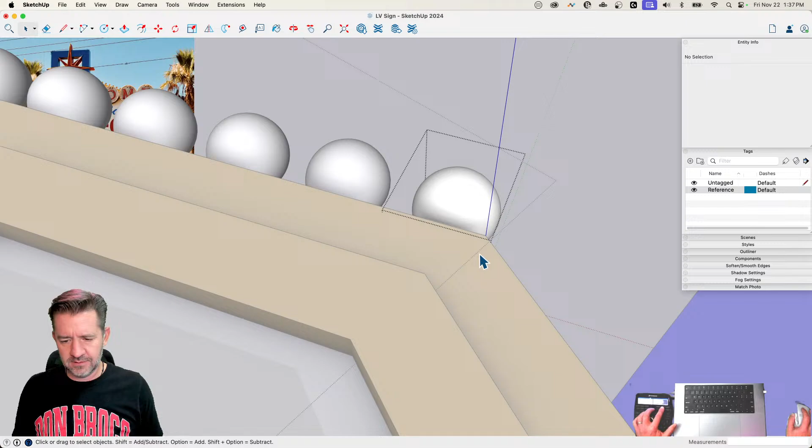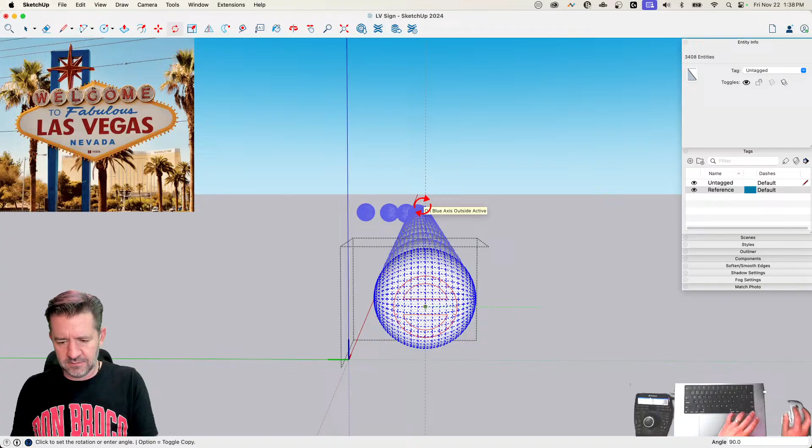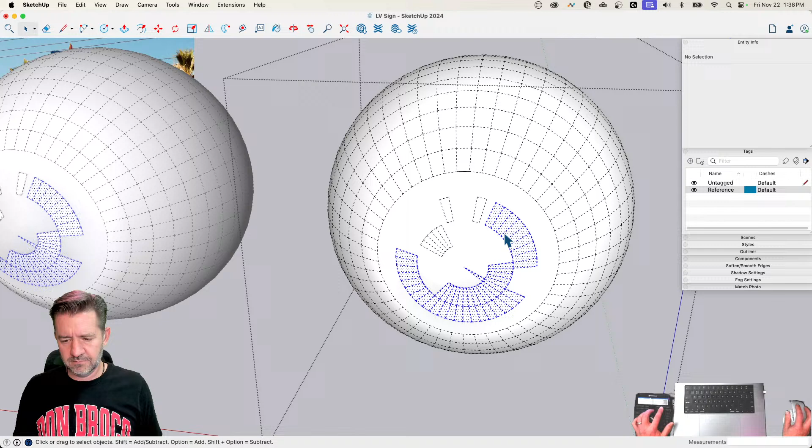All right, here's what I'm going to do. Grab all of this geometry. Rotate so it goes like that. Come in here, draw one edge right there. Grab a bunch of this geometry here. Bill says just pretend they're magnetically attached. And then I can take that, pull that out like that.

Let's soften all that back up. Let's give that a nice light gray color.

All right, so that takes care of most of them. Holy crap, everything worked perfectly. Never mind, done. I did not - sometimes despite your best efforts, it just works out, right? I mean, yeah, that's what I had planned. I did not think that was going to work, so I'm chuffed, as some of our international users would say.

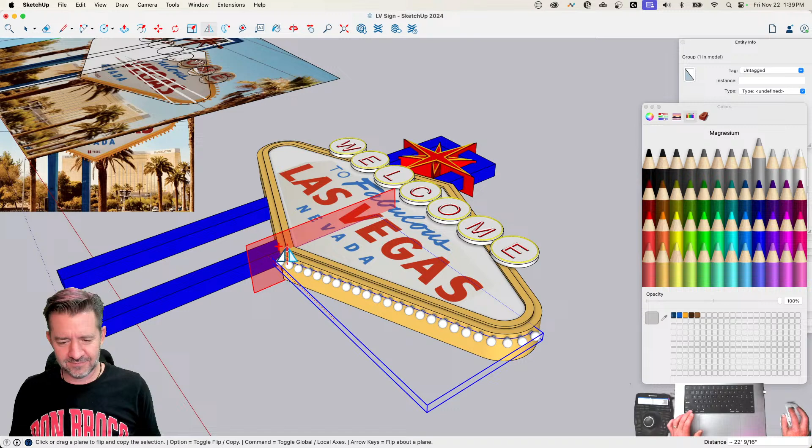All right, and then we'll take both of these, just like we did before. I wasn't making fun of chuffed, it's just not a common word here in the old US. So, back that out.

Ahmad says, well done, Aaron. Well done. Thank you, sir.

All right, take this one.

Randy says, chuffed? I beg your pardon? I may have used it incorrectly. I don't know how to conjugate that particular verb. Chaffed? Chuffed. Chuffed. Like I'm happy with the way things worked out kind of thing. Hopefully I'm not like cursing or something like that. Oops.

All right, get rid of these couple extra lines that are still in the groups. Come in here and show my edges so I can get rid of this. And then just fill that with white. Like this, delete. All right.

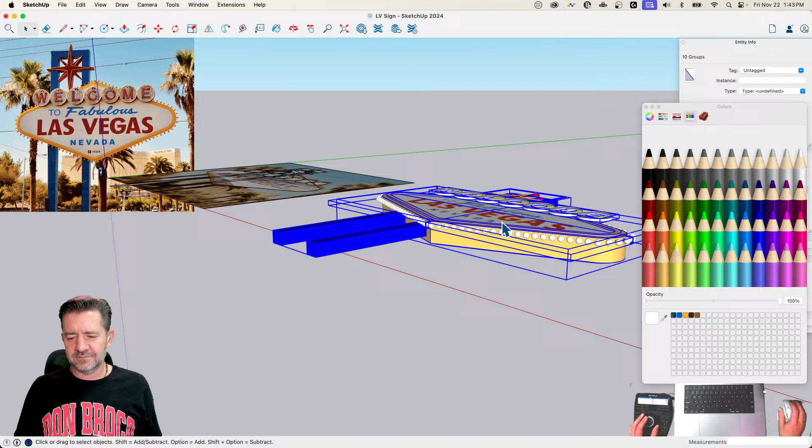Earl says, Yesco won't be pleased that their name got chopped off. They'll live. Hey, if anybody from that group sees it and is concerned, let me know and we'll make a short fixing it. All right, I'm going to group that all together.

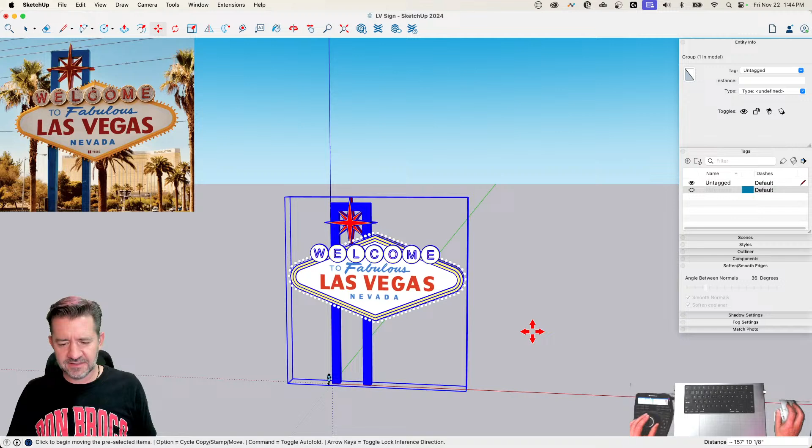I am going to stand it up. Go back and turn off my reference portion of the model. Bring that in here. I do not believe that is to scale. We'll bring that down just a bit so it's, I mean, it's a big sign, but it's not that big.

I don't know, I actually don't know how big it is. I know it's big, but it's not huge. So I was thinking it's taller. I think it's up here a little bit more like this. So come in and...

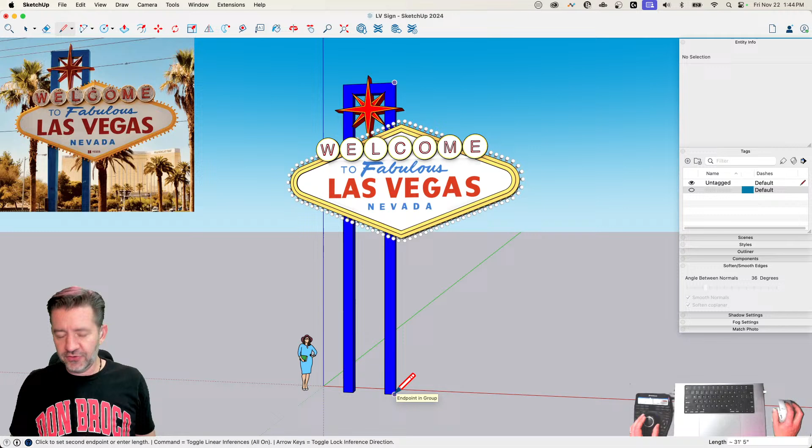Well, let me look it up. Let me look it up. There you go. How tall is the Las Vegas sign? 25 feet tall. Let's see. I went higher than that. 31. Not that much higher. Yeah, okay, you're doing pretty good.

Peggy says it's like we're there right now. All right, get those back up here, just moving them to Teddy's feet.

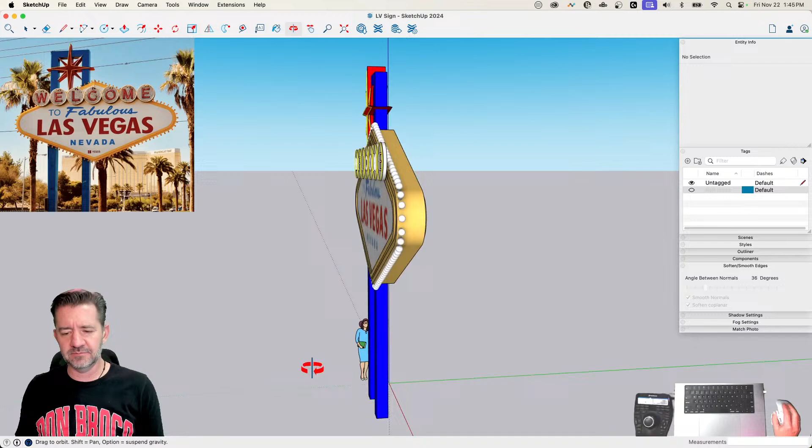Oh, Earl says he's asking about animations because he thought it'd be cool to see the lights flashing in sequence around it. You know, I was thinking about that, and again, I don't actually know, I don't remember. I've seen this sign in real life, I've seen it in videos lit up. I can't remember, but I want to have like a chasing animation where every three lights chase after each other. I was thinking about doing that. Maybe I still will. Maybe we'll come back, maybe I'll do that in a video or something like that.

Because that level of animation could actually be done just using scenes. What would happen is you'd have to have 3 copies of all the lights, so all the lights would be in a group 3 times right on top of each other. Then you'd have to go and make a sequence of lights. So light 1 and 2 would be gray and 3 would be white. Then light 4 and 5 would be gray, light 6 would be white. And you do that all the way around in the first group.

Then you'd turn that group off, and in the second group you'd have light 1 gray, 2 white, 3, 4 gray, 5 white, 6, 7, then turn that off. In the last one, light 1 would be white, 2, 3 would be gray, 4 would be white, 5, 6 would be gray. Then you'd create an animation where you link each of those groups to scene 1, 2, and 3, and just play through each one. What it would look like is the white light moving around. So that could absolutely be done.

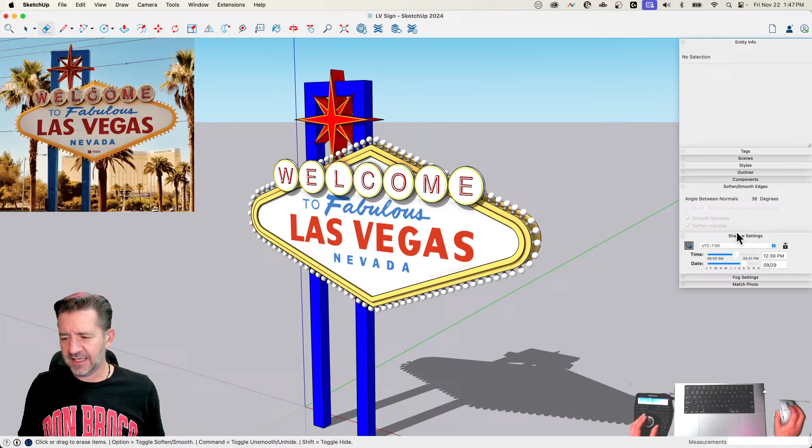That neon turned out pretty sweet, I like it, I like it a lot. All right, let's go turn off our watermark as well.